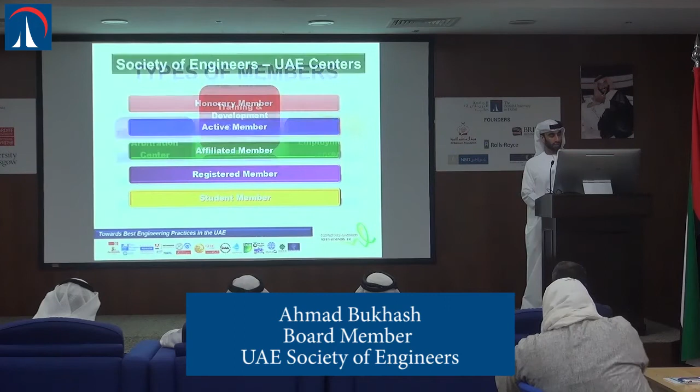Our activities include having an arbitration center, a training and development center, an international testing center, as well as an employment center. So for examinations such as the GMAT, we are a certified examination center, as well as we also do certifications for engineers of all fields who graduate outside the country and within the country, for their approval for the Dubai Municipality system, as well as a training and development center.

So one of our main mandates is also to rehabilitate engineering professionals through conducting conferences, as well as training courses and seminars, in order to enrich the field of engineering as a whole.

We have certification also for facilitating activities related to the Project Management Institute official training courses. This is one of many, so I don't want to take too much time.

These are examples of some of our free seminars, which you are all invited to join. We also have an international center for examinations, certified by Pearson VUE, with highly respected examination centers including the GMAT, RCP, and APICS.

We have a number of publications, which I hope all of you are receiving. If not, Mr. Ahmed, sitting at the back taking photos from the Society of Engineers, will be happy to take your information, and we can arrange for these publications to be sent to you as well.

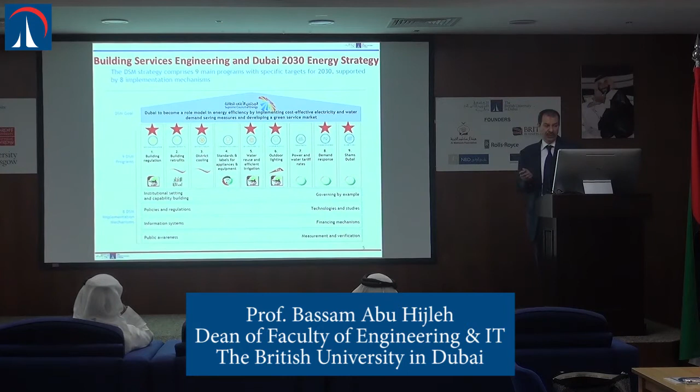Now, why should we study building services engineering? Most of the time, building services engineering is actually an interdisciplinary field. It encompasses people from different backgrounds: mechanical, electrical, civil, water, some other aspects as well. But the problem is, most of the time when people come from these different backgrounds, they are unable to speak the other person's language, unable to know what they're talking about or to communicate their ideas to them. That's why building services engineering is an important concept, because it tries to integrate all of these aspects into one. We don't expect someone graduating from this to be knowledgeable in all fields, but at least to be able to talk to the people within that team.

This is a very important concept, and it goes back to what's being promoted all along in different building regulations, that idea of an integrated design team. So you have to have the different people who control or have an impact on the design, all of them sitting at the same table, and they have to be speaking the same language. They have to be able to understand what other people are interested in, and what impact whatever they do might have on other people's designs.

The rapid development in different technologies over the years means that a lot of people have been working in the field for 15, 20 years. They're essentially working with an old set of knowledge and skills, and they need to be upgraded. This is an important concept done in a lot of other countries, but seems a little bit foreign here to us in the UAE: the idea of professional development or continuous development. We need people to continue to upgrade their level of knowledge, expertise, and skills in order to keep up with the latest technologies, and thus achieve the best designs within the built environment, in order to achieve the goals of energy saving as well as providing a healthy and good environment.

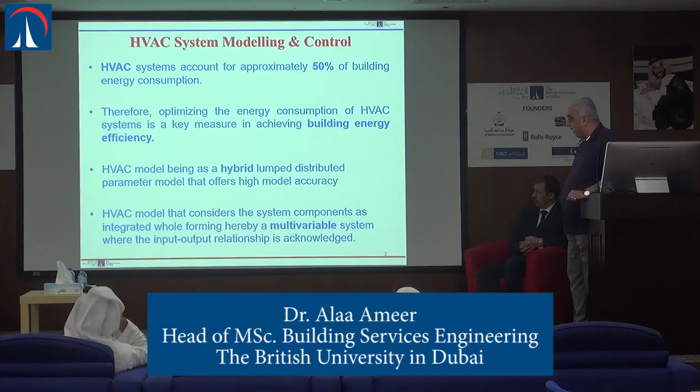We did manage to build a mathematical model based on a hybrid, lumped distributed parameter approach. The term may be complicated, but normally the modeling of systems is based on a lumped model, meaning I take any system, whatever its size, and concentrate its spatial recognition in one point. While that works, it will be very far from accurate.

We included the disperse effect, the disperse characteristic of the system, joining it as a hybrid mathematical model. It is a very complicated model, different, related to very advanced mathematics and partial differential equations, based on wave propagation and pressure wave propagation in the system. That gives us a feeling of a more actual, accurate system to build.

That HVAC system is actually a very complicated, multivariable system, meaning there are multiple variable inputs and multiple variable outputs. To get a feel for the behavior of the system in a certain environment, which has a very big spatial dimension, requires a very complicated mathematical model.

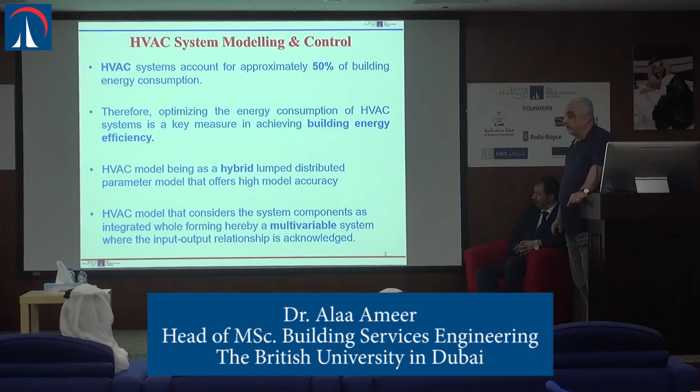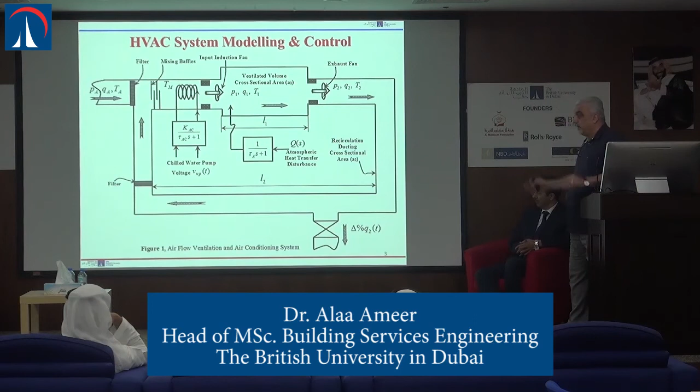The model is very complicated mathematically. It's been published in very high-ranking journals with a lot of citations, transferred as a mathematical model. We used one of the terminals and one of the airports in UAE as a case study base to apply this. The mathematical model is very flexible; we can adapt it for any space, any areas, buildings or big spaces.

This is the general HVAC system model. Why are we doing this? This is a system simulation model. The schematic diagram, block diagram of the simulation is very complicated. As we build it and execute it successfully, the result is in time domain.

In time domain, people who work in control, looking at the HVAC system itself, first we need to control and optimize the energy consumption inside the system. To get that, you need to have the feeling of how the system behaves in time domain, meaning actual time, to show you how well it will be.

It's a dynamical system. When it will be coming out of the transient area, when there's a disturbance, how it will react to the disturbance. We look at issues such as integrity and stability of the system, all in the time domain.

The beauty of this model is that you can track any inputs and any outputs. You can include all disturbances possible dispersed in the system. That gives us a very wide spectrum of analysis, ready to further design a control strategy for the HVAC system as a completed system.

As far as we know in our research, there is no such complete mathematical model for a complex system like that in the literature. As mentioned earlier, with Professor Abdullah Shamsin and Professor Bassam from our university, we used this in research, and with a PhD student working to design and develop a control strategy for this system.

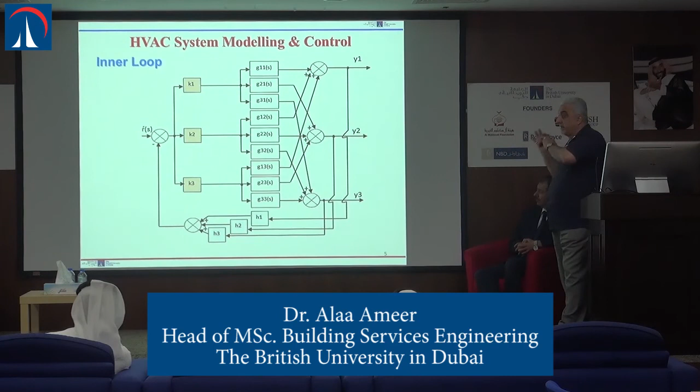Then we transfer the system and can see the interaction between all the elements in that system, and design what we call the inner loop, to maintain the system as stable, given the same required characteristics as the dynamic system in the time domain. Then we move to working with what we call outer loop design.

In outer loop design, the beauty of this technique we developed here in British University in Dubai is based on least effort energy consumption. That means the controller itself has minimum use of energy - that's the first thing in it.

How is that generated? By designing the controller with small, what we call straight weight gains. Normally all strategies available commercially in control strategy are based on very complicated actuators, such as DC motors, AC motors - complicated, already consuming a lot of energy and requiring a lot of maintenance.

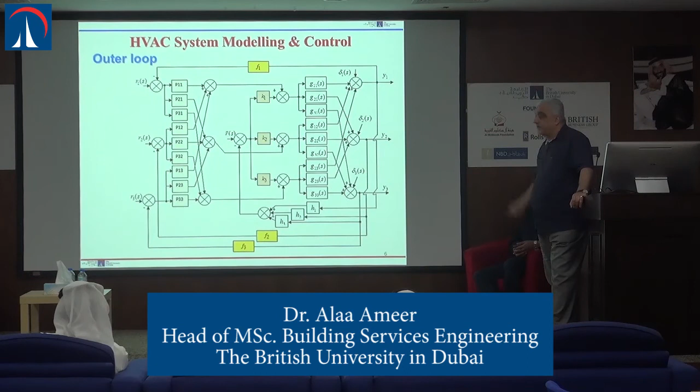While here, with straightforward small gains, we minimize energy at the same time as reducing maintenance and increasing the availability and stability of the system. It's very complicated, but it is very, very good.

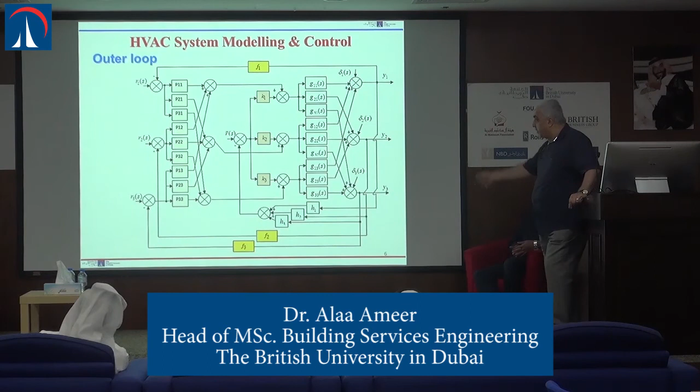Any disturbance in the system could cause instability, and instability means failure of the HVAC system. With this control, we maintain system stability, and robustness is very high - whatever disturbance comes in can be accommodated, giving you the optimum result required.

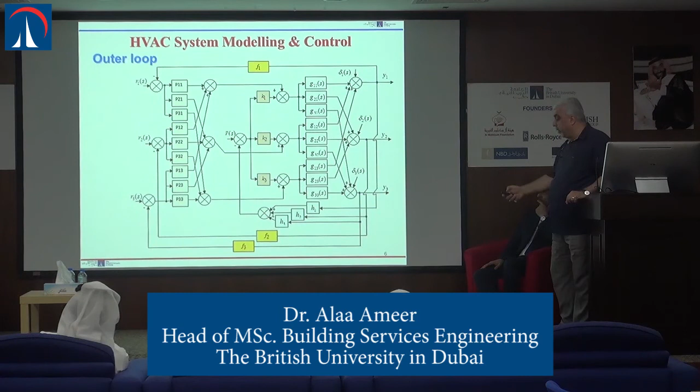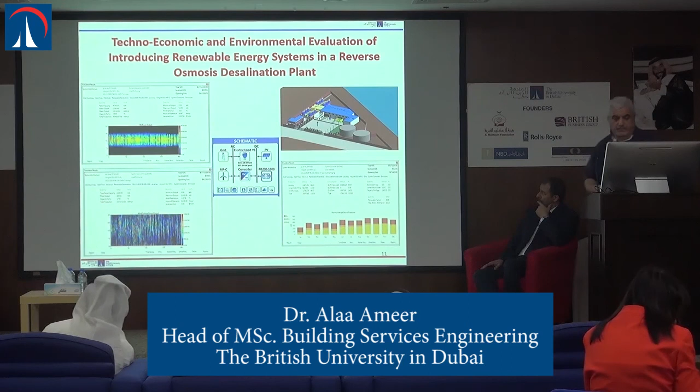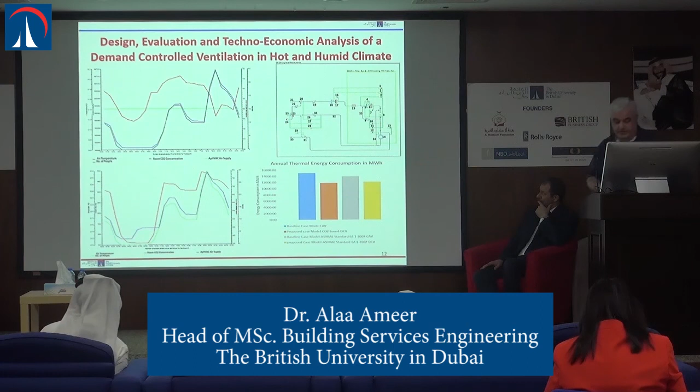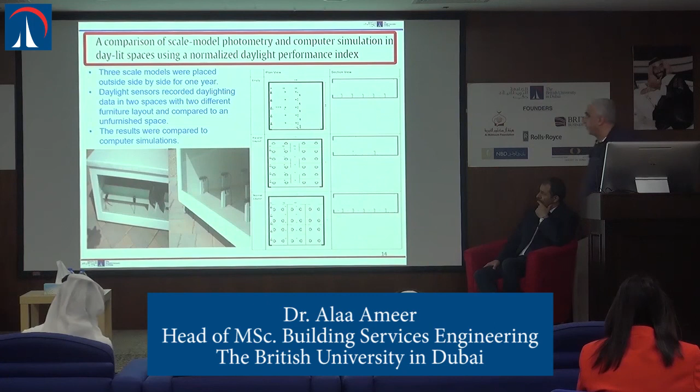Here we have another applied research project comparing scale model photometry and computer simulation. We designed three mini buildings at 1-to-10 scale, with different furniture directions inside - one with furniture, another with different furniture direction, and the other empty - with a sensor to pick up the signal and lighting, recording the complete effect of furniture on lighting.

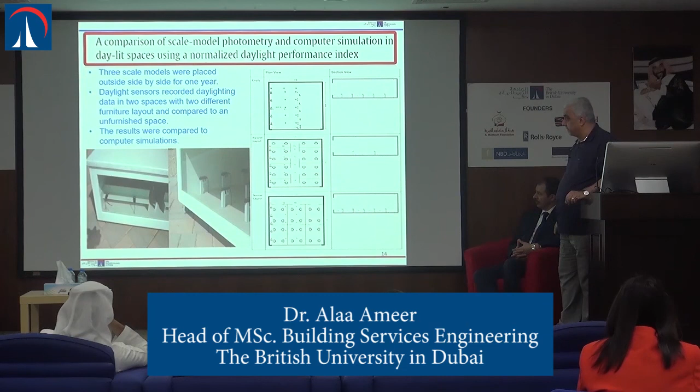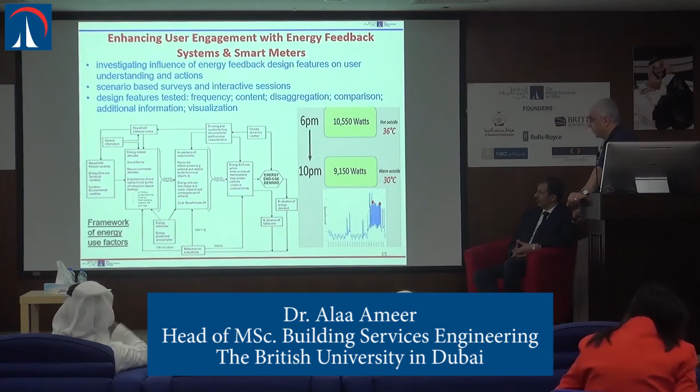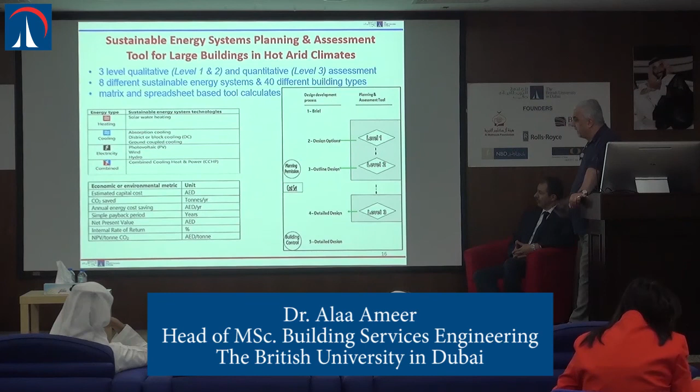Here is a suitable sustainable energy system planning and assessment tool for large buildings in hot arid climate, showing how we can work on the layers of it and the development of processes for the future.

Here is the base case performance, and here is the efficient case performance of the systems.

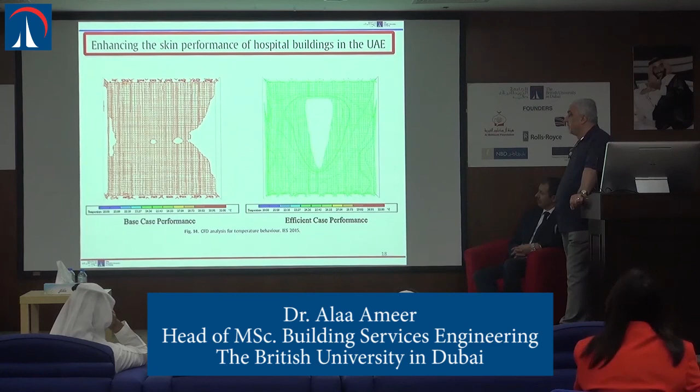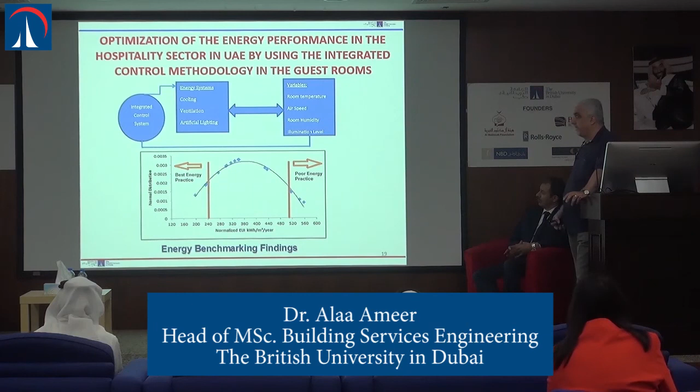Here is student research and dissertation work on optimizing energy performance in the hospitality sector in UAE using integrated control methodology in guest rooms, including building energy benchmarking, energy modeling, and trying to minimize energy control through integrating methods.